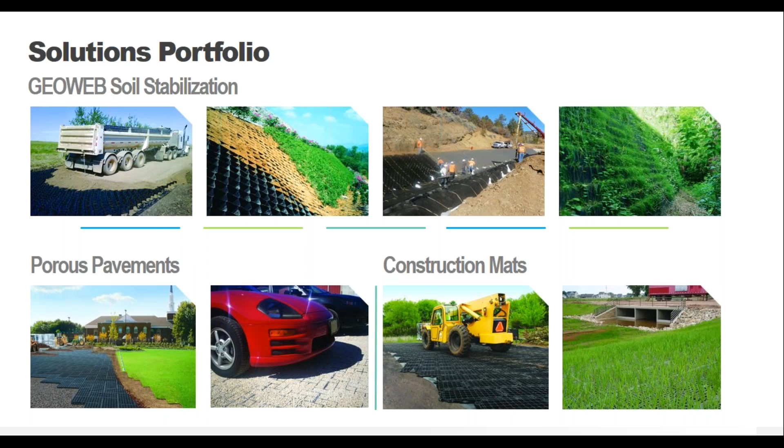So let's begin with discussing how GEOWEB 3D confinement can provide benefits for unpaved surfaces. The GEOWEB system consists of 2 main attributes. The first is the cell size. The cells come in 3 different diameters, including 20V, which is 8.5 inches in diameter, 30V, which is 10.5 inches diameter, and 40V, which is 18 inches diameter.

We have 5 different section depths: 3 inches, 4, 6, 8, and 12 inches. We have different cell lengths consisting of 18, 21, 25, 29, and 34 cells in length. The actual cell size and height depend on site-specific project details and site conditions.

As I mentioned, Presto will provide that free evaluation, including a written summary, calculations, cross-sections, and specifications, once again, no matter the size of the project. And like I said, we do not recommend the standard charts and tables.

The ultrasonically welded seam, where all of the connecting points are located, is very important to the function of a geocell. The stronger the seam strength, the better performance of the geocell, period. A strong seam allows for better lifetime performance.

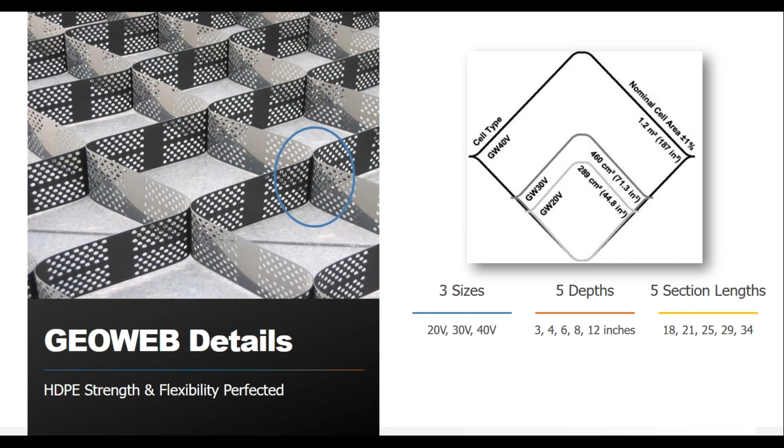Here you can see a typical GeoWeb panel. It comes tri-folded on a pallet. Each section, here you can see the tri-folded panel. It comes with a nominal width, each panel has a nominal width, and it expands like an accordion.

Different section lengths, anywhere from 18 feet up to about 52 feet. And if you have a large type project, we can actually custom make the length to meet your project conditions.

A typical pallet ships very economically to the job site. A typical pallet has approximately 3,500 square feet of material.

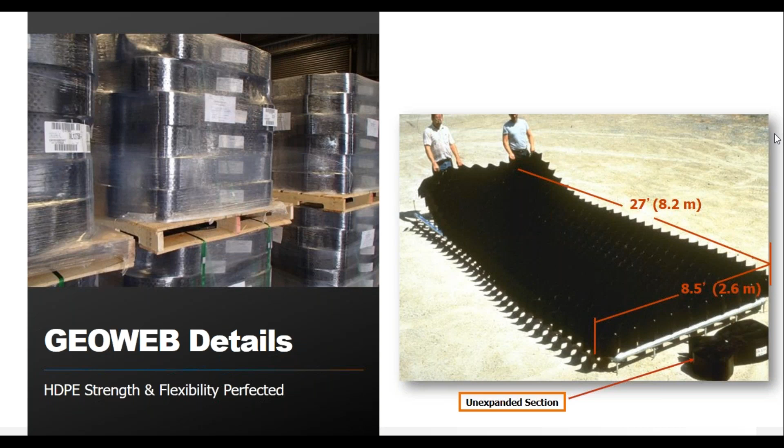GeoWeb is manufactured using a proprietary blend of high-quality virgin HDPE resin. Our proprietary formulation has stood the test of time for more than 40 years and contains no fillers, unstable polymer combinations, or exotic polymer alloys. For most typical sites, GeoWeb retains its durability for greater than 100 years, with lab testing indicating 149 years without degradation, even at full exposure to the elements.

We stand behind our numbers so you can deliver certainty in the solution as you build with the materials that you trust.

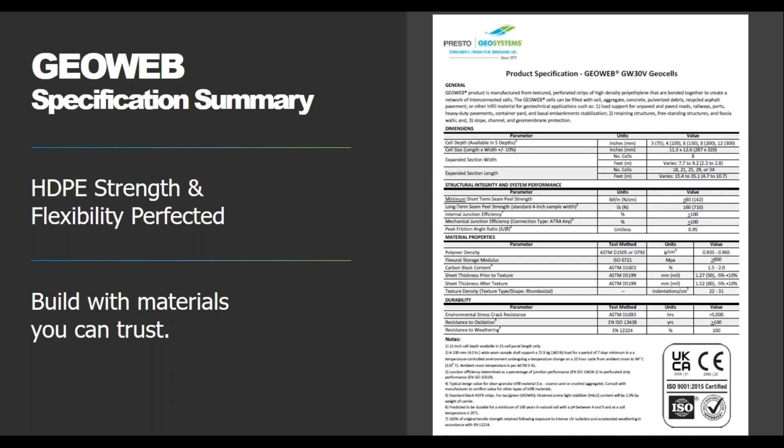GeoWeb and all of our accessories are 100% made in the USA. We do not have any products that come from outside the United States.

The system components are all of the supporting pieces that help the GeoWeb system protect the surface and sub-base layers, and also ensure relatively uniform performance of their interconnected system, thereby protecting against the damaging effects of deformation and differential settlement in response to applied vertical loads.

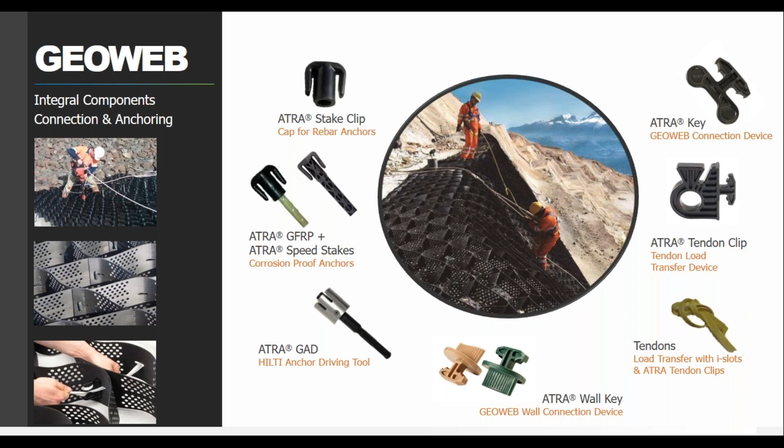Presto GeoWeb is equipped with numerous design and construction components that increase strength and speed installation for all of our different projects, whether that's load support, slope and channel protection, or earth retaining walls.

For load support applications, which we're focusing on today, the ATRA Key is the major component for a completely integrated system. ATRA Keys connect the GeoWeb panels into a single system.

The ATRA Keys speed installation and are made out of 100% plastic and will last the lifetime of the project. ATRA Keys ensure that the panels will not separate and that the GeoWeb system will not fail under anticipated loads.

The specific engineering values of the ATRA Key will ensure the system holds up to loading over time without the corrosion seen in staples or the failure of underperforming components.

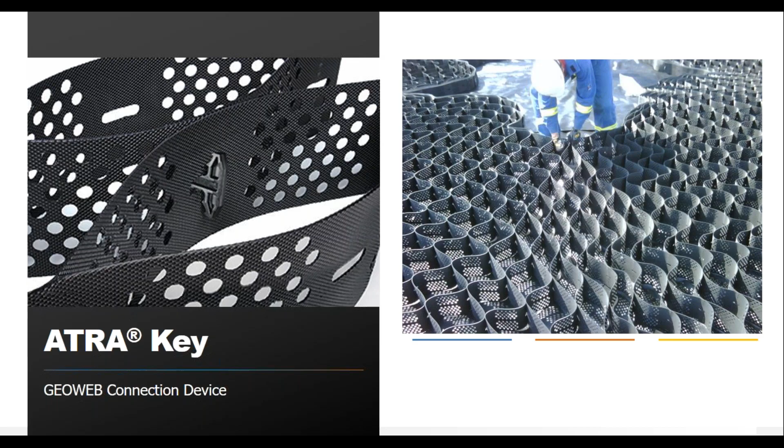The purpose of geocell confinement is very simple, and that is to stabilize the movement of unstable soils, whether that is both horizontally and vertically. It is an engineered system integrating multiple geosynthetics with the best method of confinement and subgrade stress reduction.

Although today's discussion will focus on our unpaved access roads and pads, we do have other applications which I mentioned - slope protection, channel protection, and GeoWeb walls. If you have any interest in any of the other applications, please reach out to us and we can discuss.

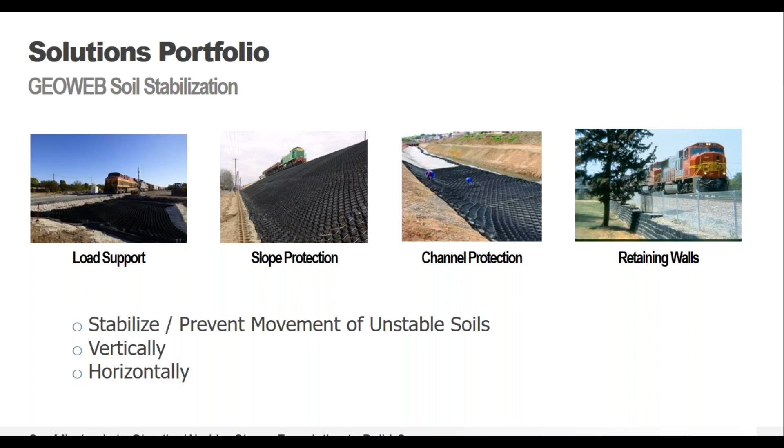Then we decide if we need a geotextile separation layer, whether that's a woven or a non-woven geotextile. That's based on the application and the subgrade type.

When we speak about woven geotextiles, we are referring to enhanced woven geotextiles and not slit tape wovens. As most of us know, slit tape wovens do not allow drainage, which can lead to pore pressure buildup, potentially global failure of the road. So we want to make sure that we're using enhanced type woven geotextiles, which allow the flow of water to flow freely up and down through the cross section.

When using non-woven geotextiles in low subgrade CBR areas, it is important to be aware of the fines content. Non-woven geotextiles are 3D in nature, so fines can actually migrate up into the non-woven geotextile and clog the openings, which can also lead to pore pressure buildup. Non-woven geotextiles are typically considered clogged before installation with fine contents higher than 15 to 20%.

So just make sure that when you're doing your project - and we'll work with you too on the subgrade and the soils report if you have the information - what type of geotextile is required for your project.

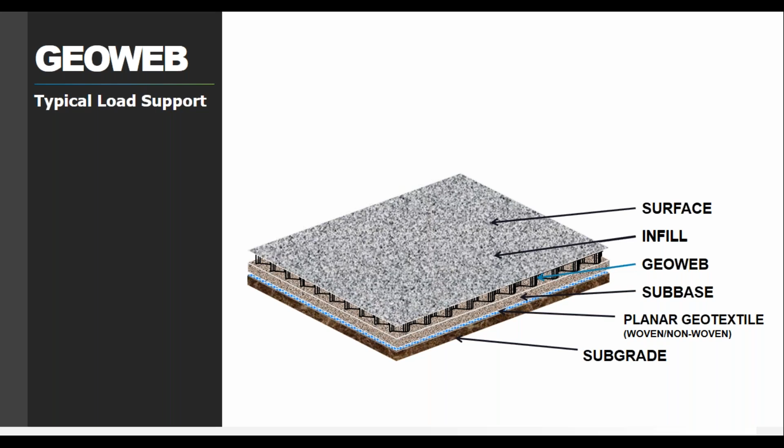We'll typically have a surface course, a wear surface on top of the geoweb to protect the top of the panels. Typically it's a minimum of a 2-inch wear surface, and depending on the amount of load and the subgrade strength, that could range anywhere from 2 to 6 inches. But we don't want too much on top of the geoweb, because then you're just going to have more rutting of that surface course in supporting the given load.

So geoweb confinement works this way: when a vertical load is applied, the active earth pressure in the loaded cell pushes back against the passive earth pressure in the adjacent cell to form a stable system. Each cell helps support the ones around it.

The geoweb cell walls also transfer hoop stress, which is important in keeping the system intact and creates what is known as the mattress effect. The strength of the seams around each cell, the material stiffness of the individual strips, and the connection method between the panels are all important factors in determining how the geocell system can improve site conditions.

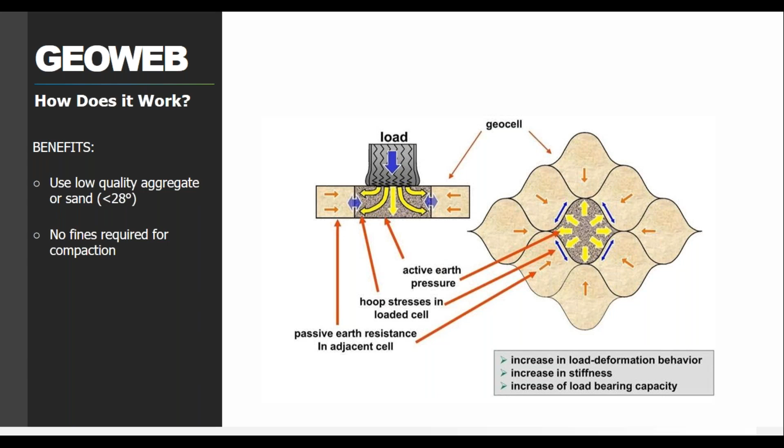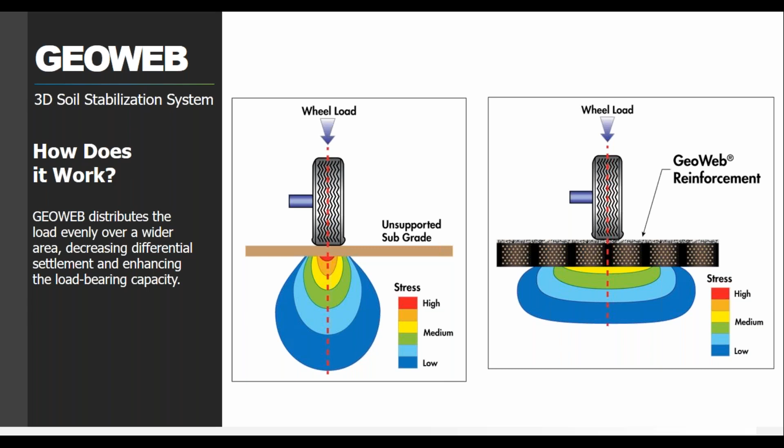Here you can see the stresses on the subgrade, with the unsupported subgrade on the left and the geoweb reinforcement on the right. Notice how there's a complete elimination of the highest stresses at the surface with the geoweb reinforcement. The stresses are reduced and distributed over a wider area, which is called the mattress effect. This reduces stress reaching the subgrade and leads to a significant decrease in deflection and rutting.

The second main attribute of the geoweb system is the infill. As I mentioned, the important benefit is that even a low quality aggregate, recycled materials such as crushed concrete, or even sand can be used to fill the cells.

Using recycled materials, low quality aggregates, pit run, crusher screening rejects, or sand saves a significant amount of money, not only on material costs but also on hauling cost. We can also eliminate fines when desired, since the cells provide confinement and aid compaction or cohesion with soils. Without fines, you can significantly improve drainage and let water flow freely through the system, preventing pore pressure buildup and global failure.

The ability to use sands and low quality aggregate really sets the geoweb apart from other geosynthetics. Those products require high quality crushed aggregates with high friction angles to achieve optimal performance. With the geoweb system, low friction angle materials are just fine. The geoweb panels achieve their full potential even with these poor materials, which can be a huge cost savings.

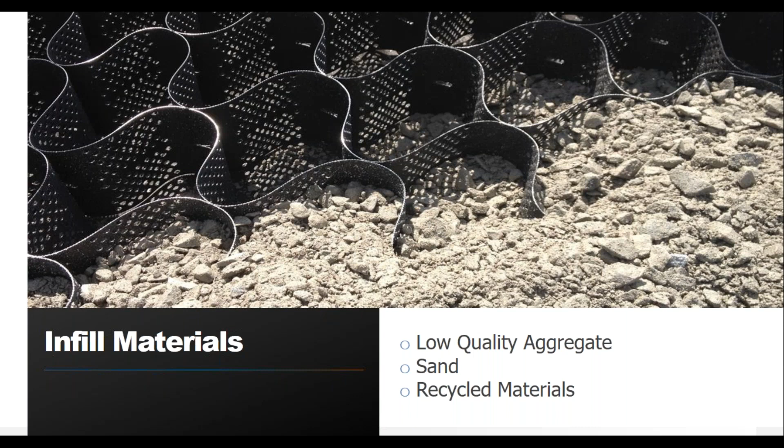We grade the area, install a layer of enhanced woven geotextile, typically with strengths ranging from 2,800 to 4,800 pounds per foot. And then we install the geoweb layer. The depth of that layer typically is a minimum of 6 inches, but the actual size will be based on our evaluation. Same with the geotextile. The actual strength of the geotextile is, once again, based on the subgrade strength and is determined when we prepare the calculation.

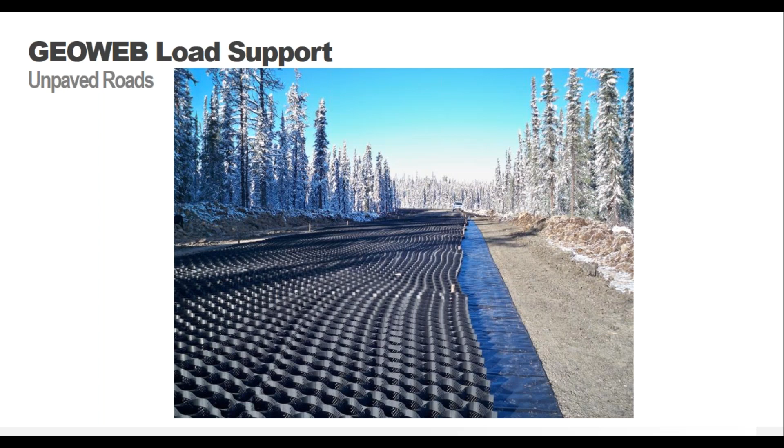Since it is an access road, a little bit of deflection is usually acceptable. We try to keep the deflection to around 2 inches. If less deflection is desired by the owner, we can prepare our calculations to limit that deflection. This is a remote access road to a drilling pad, as stated previously, so the subgrade strengths are so low, we need to construct it during the winter.

Here you can see the installation of the enhanced woven geotextile with proper overlaps, based on that subgrade CBR. This installation had a very low CBR value, so we went with a minimum of 3 feet of overlap. We typically follow AASHTO M288 and the geotextile manufacturer's recommendations for overlapping.

So this contractor has pre-assembled the geoweb panels with the ATRA Key connection device. This road was over 30 feet wide, so they pre-assembled 4 panels of geoweb together. Remember that each one of these panels is about a nominal width of 8.5 feet. So once the 4 of these panels are connected together, it basically fills up that whole 30-foot wide road. The pre-assembling of the panels will significantly speed up installation.

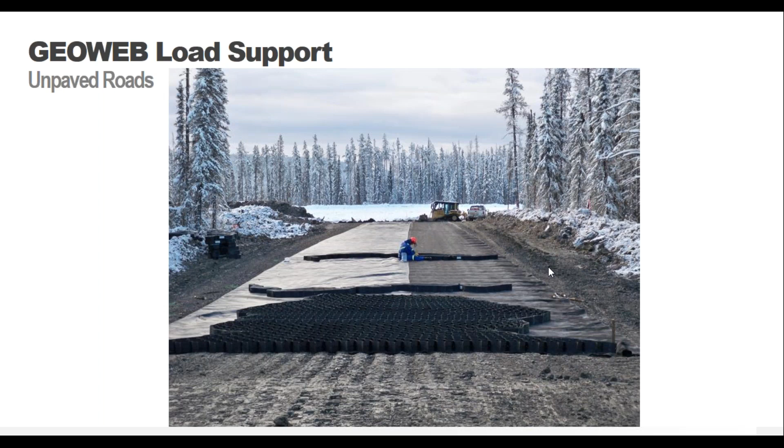Once again, your aggregate is very expensive in these remote conditions, due to the cost of the aggregate itself, but also expensive to be hauled in from very long distances away. So you can use low quality recycled materials such as sand, pit run, screening rejects for infilling. Geoweb is very easy to install in the field. You can see here that the contractor actually just cut some wood stakes to keep the geoweb panels expanded, since someone forgot to put the rebar onto the truck.

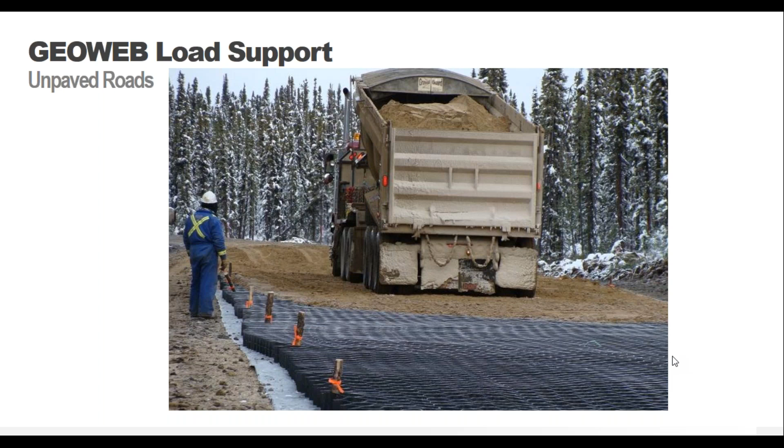So the infill here, you see the truck just backs up and dumps the material onto the expanded panels. So no special installation techniques are ever really needed. You just dump and spread the material. Once the infill is dumped onto the edge of the panels, the material is just spread out, typically with a dozer or a grader, a lot of times with a GPS system. The access road project here used the local screening rejects for the infill. Since it was in such a remote section, it saved a lot of time and material costs, but the most significant savings were in hauling costs.

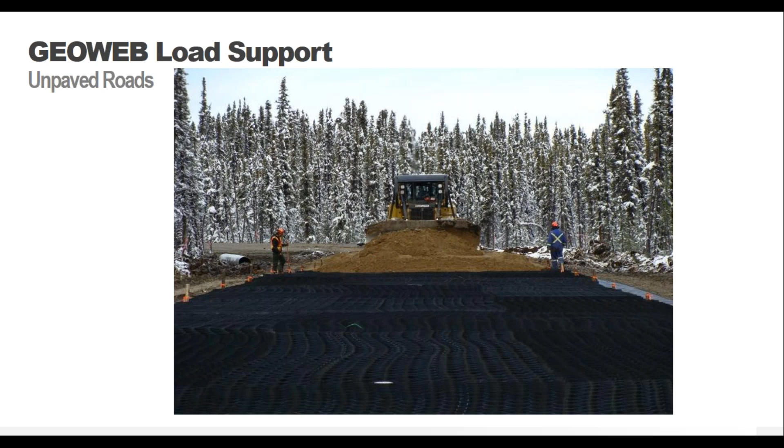This is a project from a couple years ago. The customer contacted us and our distributor to discuss the options for rehabilitation of an existing access road that was failing. The rehabilitation was required to handle the rigors of a new plant expansion and commissioning. The existing access road originally served as a secondary access road into the facilities in the region. The access road had not been in use for several years and had become almost impassable during spring and summer rain events due to neglect and lack of maintenance. So the customer asked for recommendations to provide load support options to drastically improve the performance of the road.

So one of the main challenges was to keep the road operational during the initial subgrade prep and to stage reinforcement material and gravel in advance of the road being closed for repairs. The execution plan for this road was only about 2 weeks. It's 7.5 miles long and 32 feet wide. So the project was successfully completed during a very wet construction season.

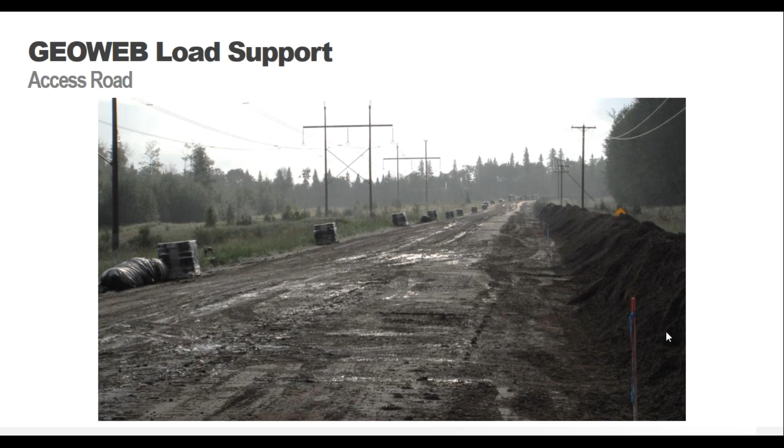So we worked with our distributor and owner to provide a recommendation that would provide a stable road surface and one that can be installed within the 2-week time frame. The initial deployment of the geoweb panels and enhanced woven geotextile, initially defined as very poor, were successful, so that a second layer was not required. And that's the second layer of geocells.

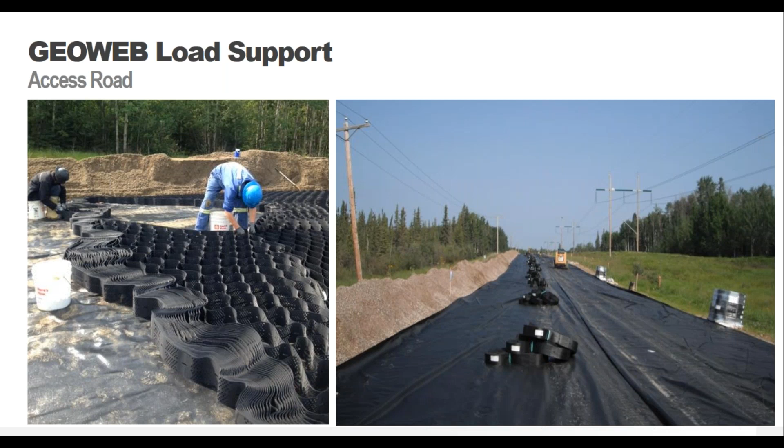A key to installation was the use of the ATRA Key connection device. The ATRA Keys, like I said, speed up that installation, and that's side-to-side and end-to-end connections. ATRA Keys are the strongest and safest connection method and allow for multiple panels to be connected and deployed at one time. The recommendation for this project was a 2,800 pounds per foot enhanced woven geotextile, our mid-size GeoWeb 30V, 6-inch deep panels, and a 3-inch wear surface.

Since this road was 32 feet wide, the road will require at least 2 rows side by side of enhanced woven geotextiles with a 3-foot overlap. Based on this width and the low subgrade CBR strength, it was determined during the evaluation phase to factory sew together 2 rolls of geotextiles to save on material used for the 3-foot overlap. We also used factory sewing of the geotextile to speed up installation to meet the 2-week construction window.

When you need additional rolls of geotextile side by side, I would highly recommend reviewing the option of factory sewing the 2 panels together. Factory sewing eliminates the overlap, which on this project would basically save 3 feet. So you can imagine how much material was saved. Since the road was 7.5 miles long and with the elimination of the 3-foot overlap, we saved over 20 rolls of enhanced woven geotextiles, resulting in material savings of over $40,000. That savings did not include the additional savings in reduced shipping and installation time.

You can see in this photo the geotextiles factory sewn together, and it is folded over before being placed on the roll. Then you just roll the geotextile out and unfold. Factory sewing also makes it very easy to pre-tension the fabric before placing the geoweb panels, since it is one large piece. The cost of the factory sewing is very inexpensive. Sewing is usually less than the cost of material wasted by overlap, and sewing really speeds the installation rate.

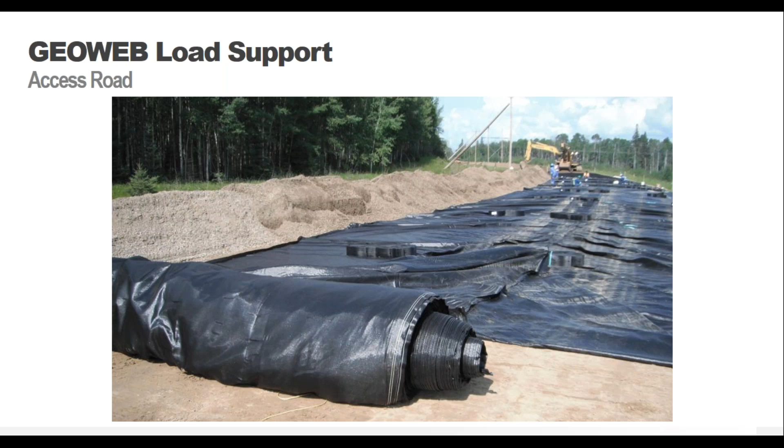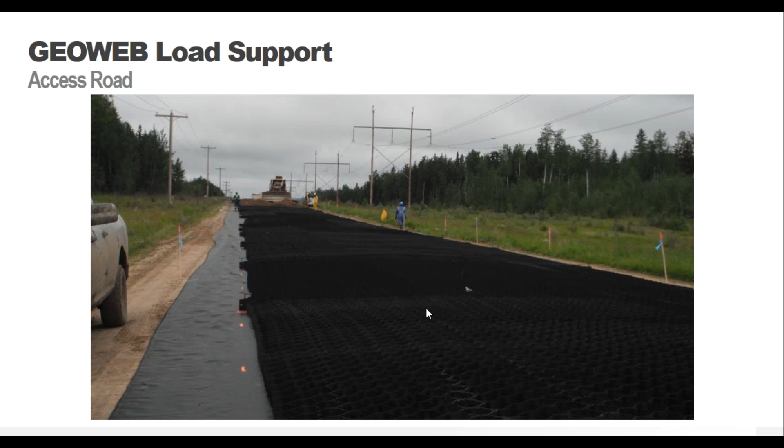The contractor for this installation wanted the road width to be very precise. So once the woven geotextile was placed, the survey crew went and marked both sides of the road. You can see the stakes here and also the dashed line here where the panels went down. The stakes on the side of the road were to keep the panels from moving when expanded. And notice the minimum staking required. So prior to gravel install, the left edge is pulled and oriented to be right along the dashed spray-painted line on the left side.

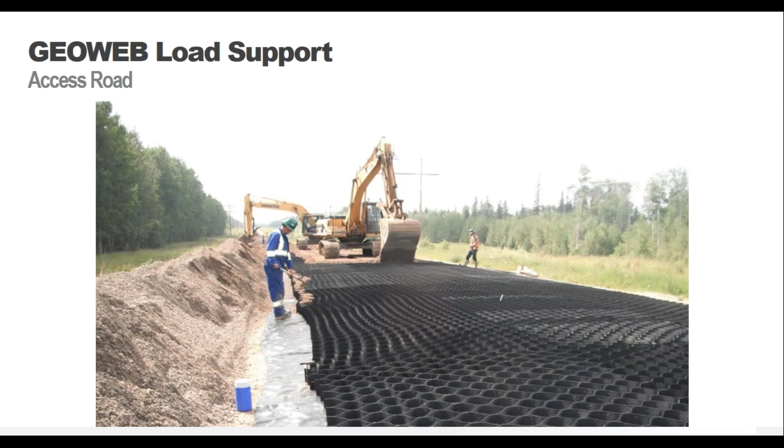Here you can see the geoweb infill being stockpiled on the left side of the road. Then the excavator filled the 2 lanes down the roadway and transferred the remainder of the stockpile material to the geoweb panels. As mentioned previously, that fiber optic line ran down the right side of that road. It was completely off limits.

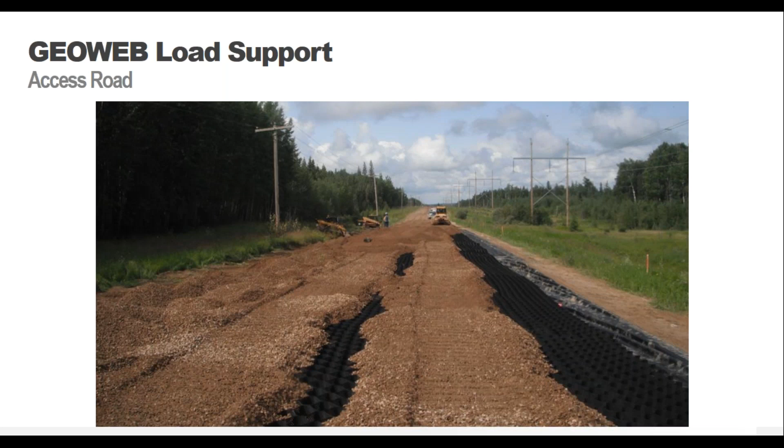Here you can see an up-close view of the 2 tracks installed by the excavator. Once the excavator constructed the 2 lanes, smaller bobcats followed along and were used to transfer the remaining stockpile material and fill in the geoweb to get grade and crown. So once that was finished, a dozer was used to final grade the road.

Typically, as I mentioned before, dozers have a GPS unit for a consistent final wear surface. For this project, we did recommend a 3-inch wear surface over the top of the geoweb panels due to the number of passes. So the wear surface may be a little more when a roadway or pad is subjected to very heavy loadings.

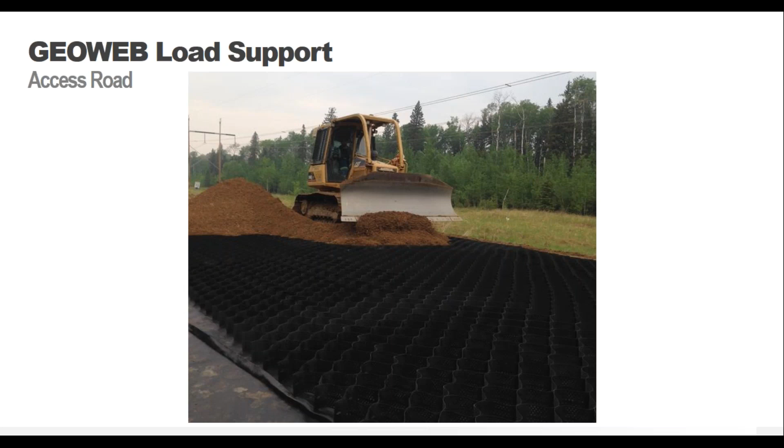We have completed some projects using geoweb for stabilization for walking drill rigs that have a very heavy loading and heavy footprints over a small area. And we use 6-inch wear surface for those applications.

And here's the completed road finish in time with the wet weather. Remember that this project was 1.3 million square feet, 7.5 miles, 32 feet wide. It was installed in 2 weeks with a little bit of downtime due to wet weather. Like I mentioned before, it's installed very quickly. And once the crews get going, a crew of 3 to 4 can easily install 3,000 to 4,000 square feet of geoweb in an hour.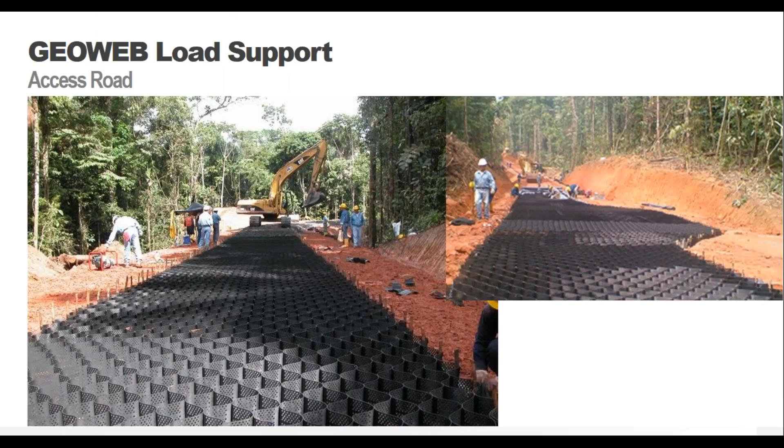So each Geoweb panel has a nominal width, as I mentioned before, of 8.5 feet. So we just connected the panels together, just overstretched them a little bit. When installing Geoweb, it's pretty flexible, so you can over or under stretch the panels to meet a certain width. You can see the owner wanted to have a very precise edge to the road, so they staked it almost every other cell on the side of the road. You can see it right here and on both sides.

Interesting part of this project is rather than make the entire road wide enough to accommodate 2 vehicles to pass side by side, they added pull-offs to let vehicles pass every couple hundred feet. And you can see that right here. So about every couple hundred feet, they had this little pull-off area, so the vehicles just pull off and let another vehicle pass. You can imagine how much money that saved them versus constructing an entire 6-mile road, double that width. It's very easy to accommodate curves with the Geoweb panels since they're so flexible. You just over or under expand the panels depending on whether it's an inside or outside curve.

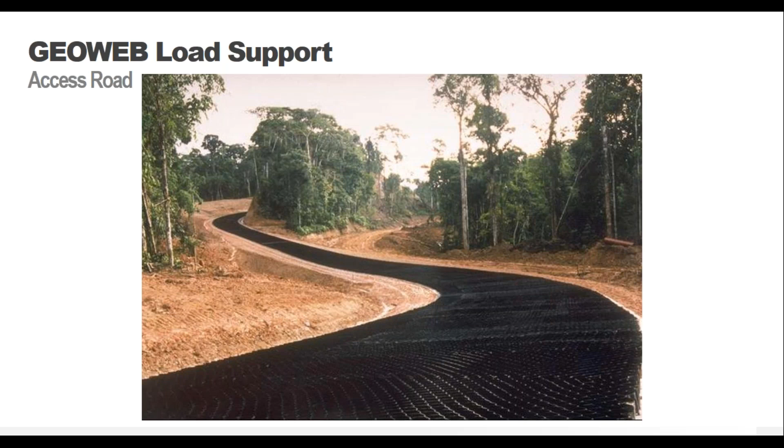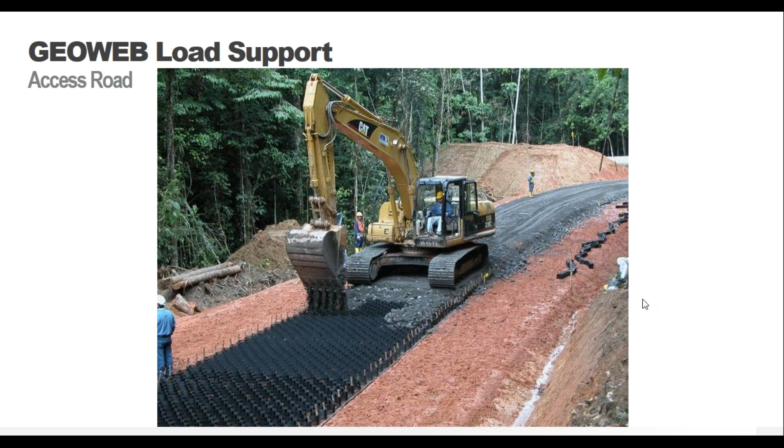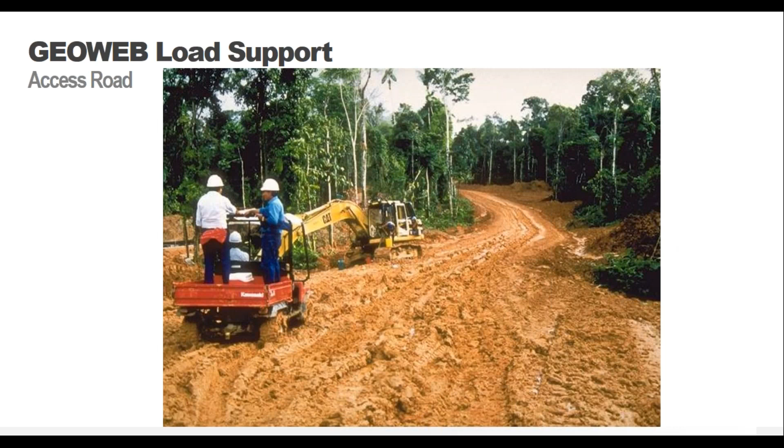Here you can see them infilling with the locally sourced sandy aggregate mix. This area gets a lot of rain during rainy season. So the recommendation included the addition of channels adjacent to the roadway to divert the water away from the roadway. And here you can see those channels right here on the side. And also some pre-assembled Geoweb panels. So we went from this rutted, muddy, messy roadway that was basically completely unpassable to a finished roadway. So quite the improvement from the original that was severely rutted to this finished roadway.

This is a really interesting project. This was an access road in a really swampy area south of Baton Rouge, Louisiana. The original design included a couple layers of geogrid. The contractor installed about 1,000 feet of that. During this time, that area got just pounded with rain, significant rainfalls, really low subgrade CBR, and due to the heavy loads, low subgrade CBRs and the heavy rains, 1,000 feet of grid actually failed after a couple passes of the vehicles trying to access the site for construction.

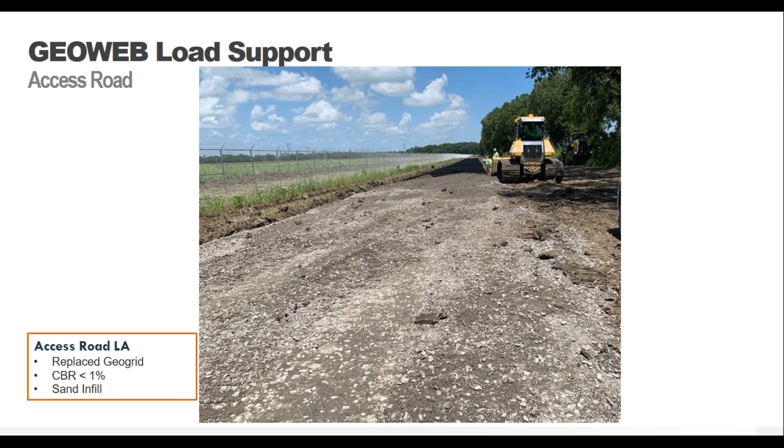So due to this, the engineer contacted us since we have worked on so many projects with them. We prepared a value engineered solution. So the 1,000 feet of installed geogrid was removed, and replaced with a layer of 4,800 pounds per foot enhanced woven geotextile and our mid-size GW30V panels, 6 inches in depth.

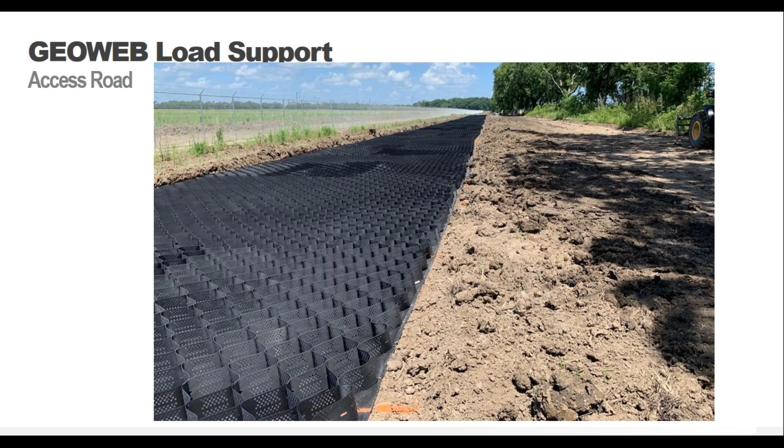So the geogrid design, like I mentioned, had 2 layers of grid along with 16 inches of high quality aggregate. So we accomplished a successful access road with a lesser quality and lower cost aggregate with a cross-section reduction of about 50%. Once again, you can just see the flexibility installed for the curves in the roadway with really no issue. This roadway had a significant number of curves that we had to negotiate, so that panel flexibility is very important.

A Presto representative or one of our distributors will be on site to help the contractor negotiate curves, since it's very easy once you've done it, but very hard to explain in the installation manual. So once again, it's important to have on-site presence from the manufacturer to teach the contractor the tricks for a speedy and efficient installation.

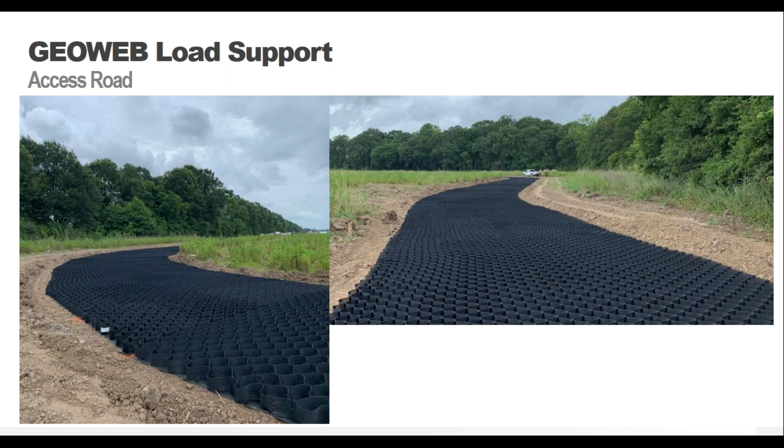Once again, the infill is just dumped onto the unfilled panels and spread with a bulldozer, typically outfitted with a GPS unit. The infill used here was a low quality aggregate sand mix that was pretty local to the site, so the owner saved money on the infill itself and on hauling costs. This is a big advantage, especially now with aggregates. There's really a shortage of aggregates in the U.S., certain parts of the U.S., Canada, and pretty much around the world trying to source good high quality aggregate.

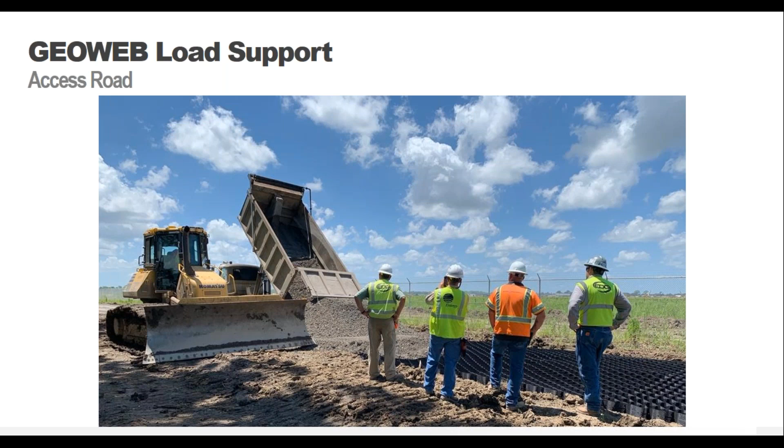Here you can see the final road after construction.

I'll talk about some drill pads. For a typical pad, once clearing and grubbing is completed and the drill locations are marked, a clay base is provided to control spills, leaks, and drainage. You then bring in wooden swamp mats to allow for construction equipment access, then heavy steel mats are installed to allow the drill rig to operate on the pad. When drilling and completion works are finished, the mats are removed to allow installation of the piles, piping, and electrical work. Since the clay cap doesn't drain well, once the steel mats and wooden mats are removed, the clay subgrade needs to be reworked, reconditioned, and regraded.

If the clay gets really wet, wooden mats typically get pushed into the clay layer, and additional mats may be required. These wooden mats are heavy, typically about 15 by 20 feet in size, so you need a front end loader to move them around the site to replace them. That front end loader will further degrade the clay layer as it traffics across the site. We've been told by some owners that rework costs can easily exceed $500,000 or more, depending on the size of their pads.

Due to these rework costs and delays, several owners reached out to Presto and our distributor to evaluate using GEOWEB for the pads to replace the wooden mats, based on success they'd had using GEOWEB on their roadways. The advantage of using GEOWEB is you build the pad up front, eliminating the need for wooden swamp mats and any associated rework costs. When drilling and completion operations are finished for a typical conventional pad, they always place about an 8 to 10 inch gravel layer to support operations. By using GEOWEB versus wooden mats, we reduce the requirement for reworking the clay subgrade and provide a clean, free draining platform to conduct operations, which actually reduces the life cycle cost.

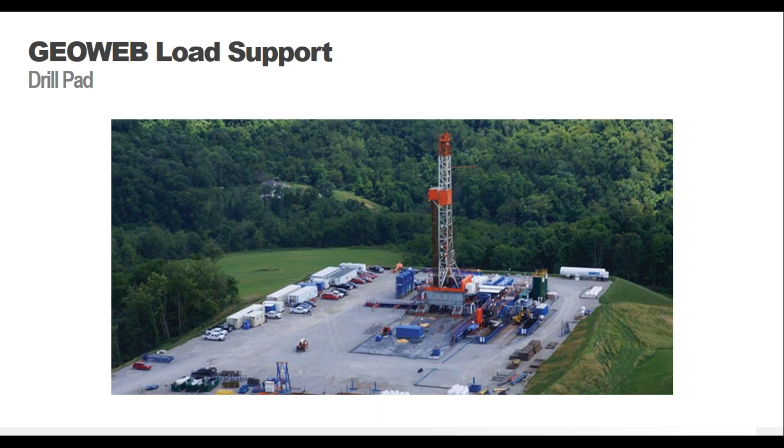Often, construction of the pad, drilling, completion work, and operations each have their own separate budgets related to a given site. By using GEOWEB, we reduce the overall construction cost by building a stronger, finished pad up front and eliminate all the rework costs. Some pads are now being constructed with liners, and we can still offer advantages by providing a more stable wearing surface and less maintenance.

Since GEOWEB can provide a finished surface before any drilling work begins, you can imagine all the money saved. There are no wooden swamp mats required, and we eliminate the rework costs associated with the mats.

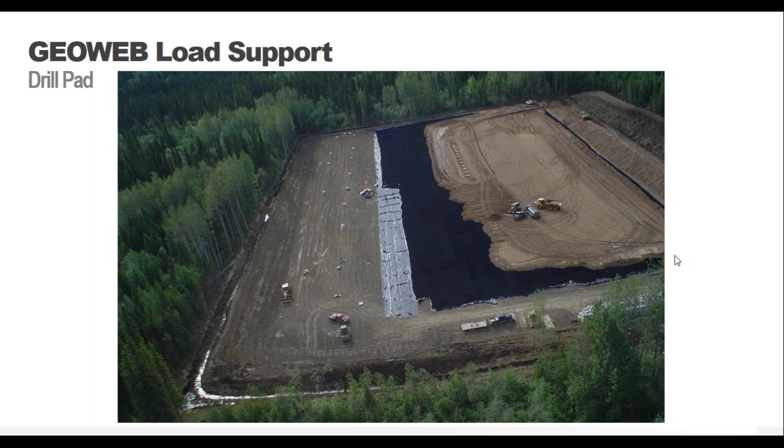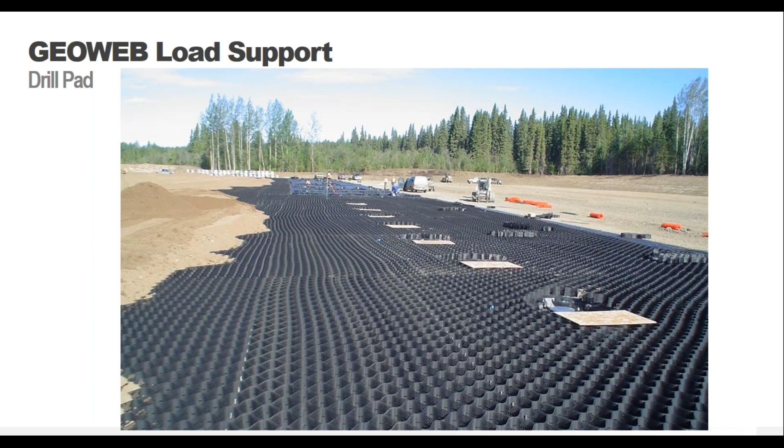Before GeoWeb is infilled, it's very easy to cut. Typically, you just use a razor knife. There's really not much strength to GeoWeb until it is backfilled and compacted.

This pad used screening rejects for the infill, so it's a very economical infill. The workhorse goes over the top of the panels. Sometimes they'll bring in a crushed aggregate.

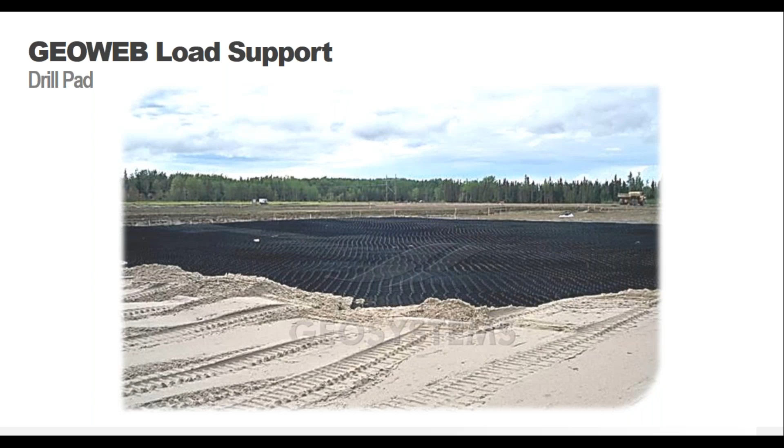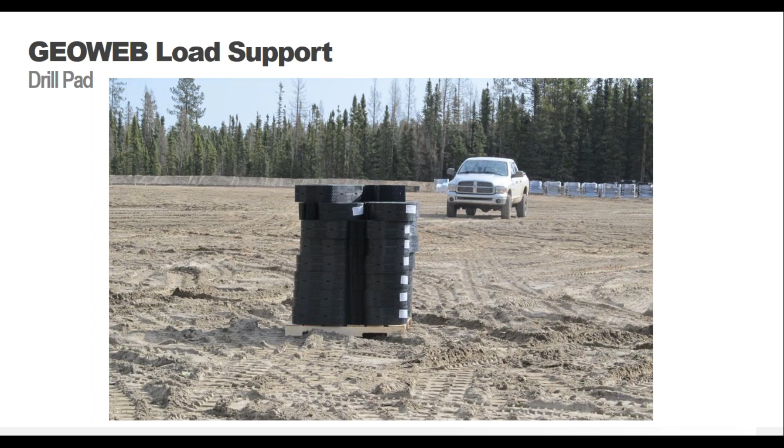GeoWeb also allows for improved site drainage as the water can flow freely laterally through the panels. This is the beginning of a typical pad that we've done multiple times for a major oil company. This is actually up in Canada.

Each pad is about 325 feet by 400 feet, so a total of about 130,000 square feet. We worked with the owner and our distributor to come up with a pad design. This was a typical pad design when they had a CBR around 2%. The evaluation showed an installation of a 2,800 pounds per foot enhanced woven geotextile.

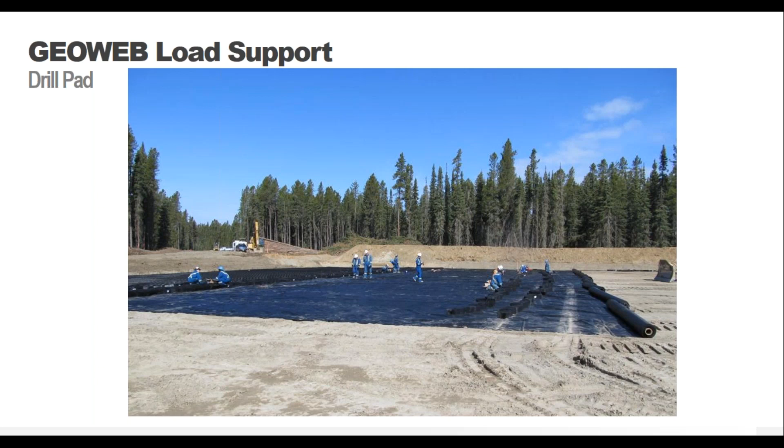As we discussed earlier, the seaming of the geotextiles in the factory—this project just overlapped separate rolls. It was a pretty decent CBR. Once again, this pad was approximately 130,000 square feet.

You can just see the contractors pre-assembled a couple sections of GeoWeb together with the AttraKey. Each section here is about—we used our 34 cell, so it's about 270 square feet. They are pre-assembling 3 panels, so each section they put in is about 810 square feet. So the AttraKey really allows them to speed up the installation.

Here you just see an up-close picture of the worker connecting the pre-assembled panels using the AttraKey. If you look down at the bottom or the side of the key on the right here, we've added frictional barbs to enhance frictional lockup with the textured GeoWeb cell walls.

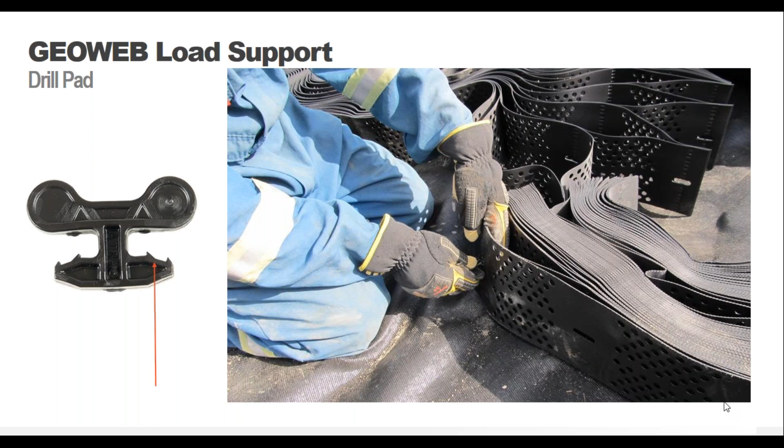Together, these features provide added protection against the 3 primary modes of mechanical junction failure. Those include shearing, splitting, and peeling. So, like I said, it's a pretty typical pad, as I mentioned.

The contractor on this pad used 2 crews of 3 workers, and they installed 130,000 square feet in 3 days. They were achieving installation rates well over 3,000 square feet per hour. So once again, the panels go down really fast.

This same crew went to another site to install the exact same pad and layout. So the contractor tried to save a couple bucks and went with a competing GeoCell and their zip tie connection device. It took the same crew, the same 2 crews of 3 workers, 10 days to install the exact same pad, since they could not pre-assemble panels and had to install each panel separately.

So it cost the contractor an additional 7 days of installation time and over $20,000 in extra labor costs to construct the same pad. As we all know, time is money, and project delays can be very costly.

On these drill rig pads, for this project, if they would have showed up with the drill rig, as they did the last one, within 4 days after starting construction, the pad would not have been ready. If that is the case, a lot of times they just typically take that drill rig and move it to a different project which is ready. So we'll have to wait for another drill rig to get ready, which can lead to a lot of lost time.

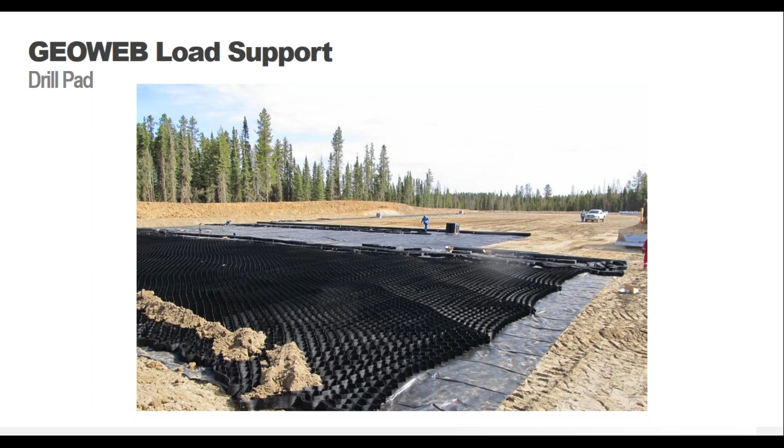So when evaluating products, it's really critical to look at the entire package versus just the material cost. Presto, or our distributors, will be on site to help the contractor install the panels, including all the tricks to speed up that installation. We also have hundreds of installation videos we share during our pre-construction meetings with the contractors.

Here is a finished picture of a completed drill pad. This is one that went with GeoWeb.

This is what the pad looked like after 1 full season of drilling and completions work. The pad went through 1 winter, spring, summer, and the following fall. The drilling operations used no wood matting through the entire process, and the surface of the pad did not need any rework prior to getting ready for infrastructure and tie-in work. The pad was constructed with geocell up front. So this pad, you can see, is in tremendous condition, considering the abuse it had taken over 1 year of activities.

As discussed, the advantage of geosystems is you don't need the wooden swamp mats. That means two things. One, you don't have to pay to rent them, and you don't have to move them around site with a front loader, or have additional mats required if the pad degrades. Two, you can access the ground to place infrastructure like piles or electrical without moving mats around. So eliminating the wood mats leads to significant time and cost savings.

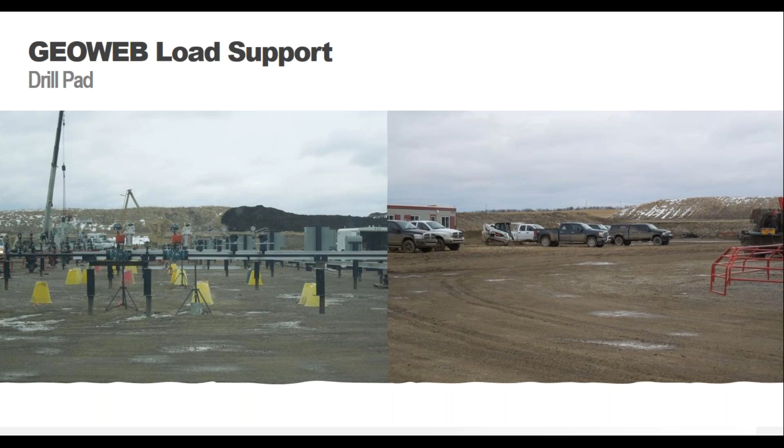The right-hand photo shows the peripheral area of the pad, and it's in great shape after the drilling and completion operations. The left-hand side shows the piping and supports. If you had wood mats, they'd all have to be removed before that installation took place.

This is the same facility after 5 years of operation. After drilling and completions, the site was turned into a production pad. After 5 years, they have yet to rework the surface, even after all the vehicle traffic and maintenance equipment that has accessed the production pad. So 5 years of operation without maintenance proves the impressive performance and cost savings due to using geocell. It's best to eliminate the wood mats by using geocell up front and build the pads to save time, material, maintenance costs, and reworking of the pad.

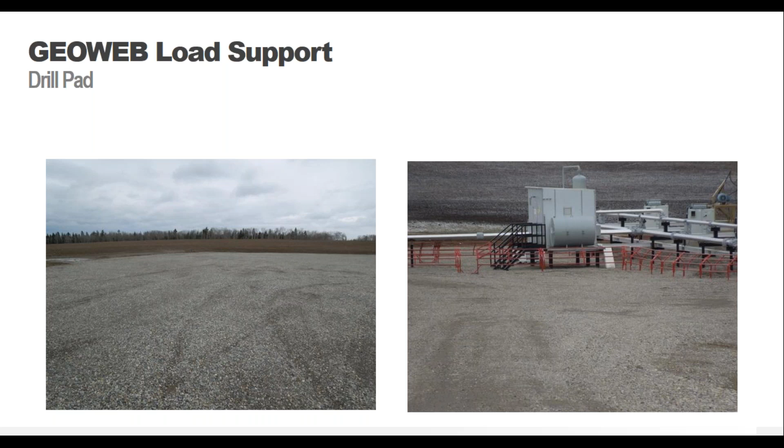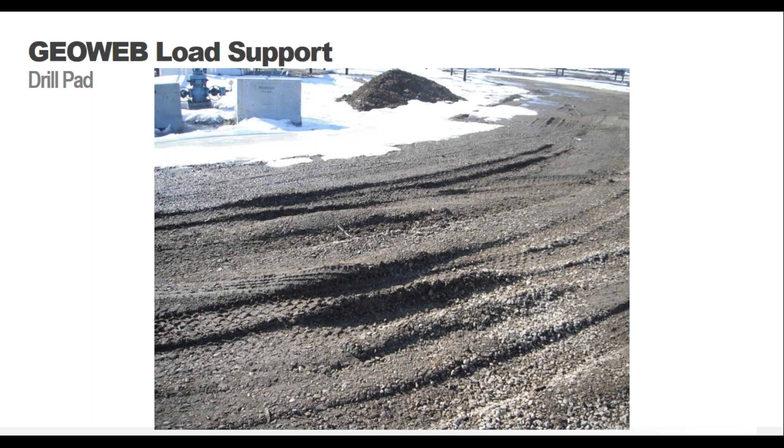The overall cross section here was about 8 to 10 inches of crushed aggregate, but as you can see, the fines have migrated from the subgrade below and have contaminated the layer, which is leading to the severe rutting. Due to the weak soil conditions, large ruts were being formed with the heavy vehicles.

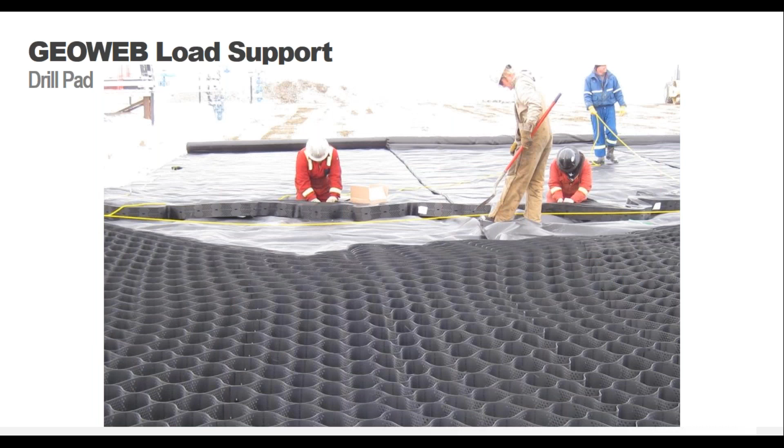The challenge was to provide a solution that was less expensive than matting, and that could be installed during the winter construction season and left in place for the life of the lease. The entire area that required stabilization was approximately 90,000 square feet. The pad was about 200 by 400 feet. We worked closely with our distributor and the owner to come up with a recommendation based on actual site conditions, vehicle loading, and the number of passes.

Once again, here we went with an enhanced woven geotextile, our mid-size GW30V cell, 6 inches in depth, with a 4-inch wear surface. Here you can see once again the workers connecting the panels together with the ATRA Keys.

Geocell sections are very easy to deploy and install with local crews, even in remote or difficult access locations. The only training required is the tricks I've discussed to speed up installation, which we provide prior to startup. A representative from Presto or a distributor will be on site to assist with installation.

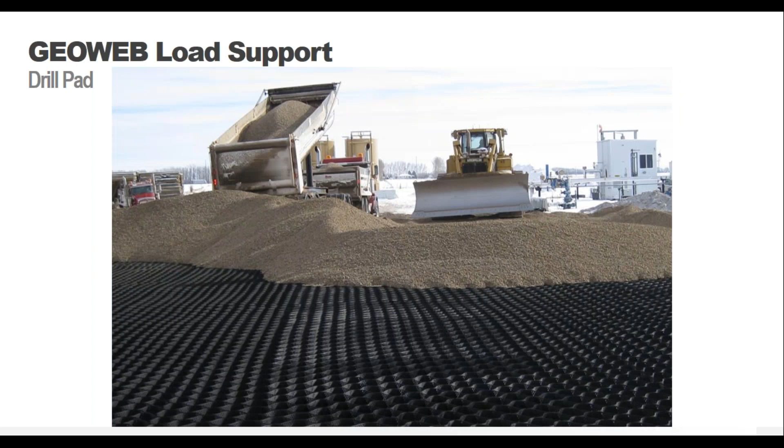To save further costs, the contractor used screening rejects, which work just fine inside the panels, as mentioned. You don't have to have a high quality aggregate to achieve stability with the geocell; we can use those low quality aggregates. When we developed the geocell technology back in the late 70s with the Army Corps of Engineers, geocell was actually called SandGrid. It was developed and basically invented to use with sand infill, and that was the intent when we developed this technology back in the late 70s.

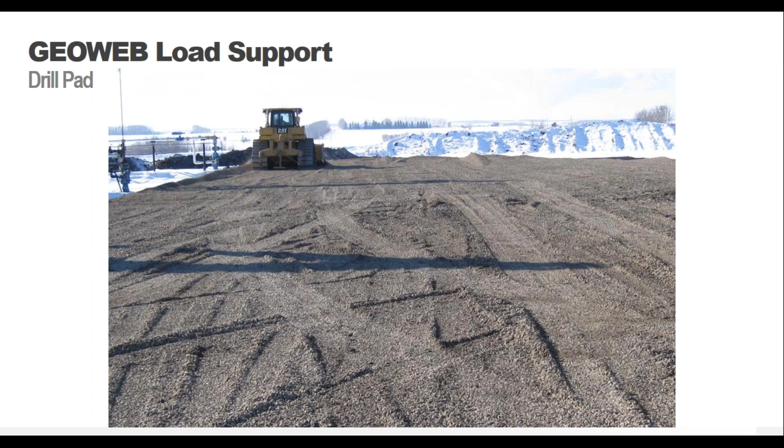As shown in the previous projects, the geocell infill is spread out with a dozer. A lot of times installing geocell infill and just driving over the surface provides adequate compaction. Compaction with a drum roller sometimes really isn't even needed. From this muddy mess that requires constant maintenance, additional material and high maintenance costs, to this clean, well-graded surface that will support the heavy loads, but also drain without the issues associated with a poor quality subgrade.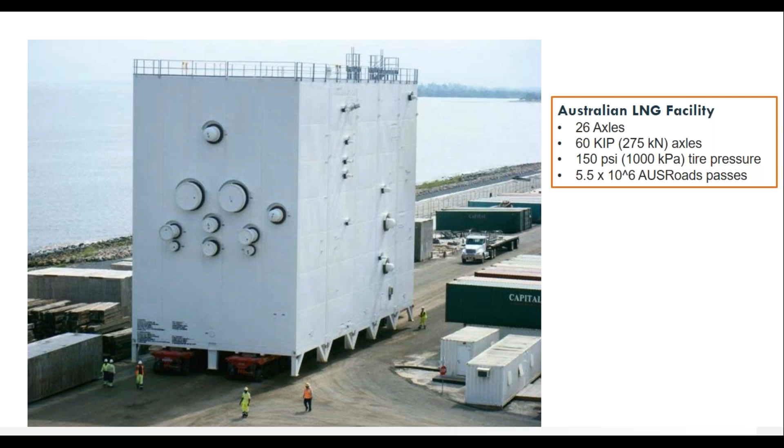Probably about 10 miles to the site. You can see the facility had 26 axle loadings, about 60,000 pounds each, tire pressures 150 PSI. So we worked with the contractor to prepare a design solution based on about 5.5 million passes and a 30-year design life.

We used the AUSRoads method for this evaluation. Here you can see the cross section we developed with the contractor. It was a very interesting design since we had to design the cross section not only for the load support, but also for the reinforced slope, to make sure the section did not globally fail on the edges as that heavy vehicle accessed this roadway.

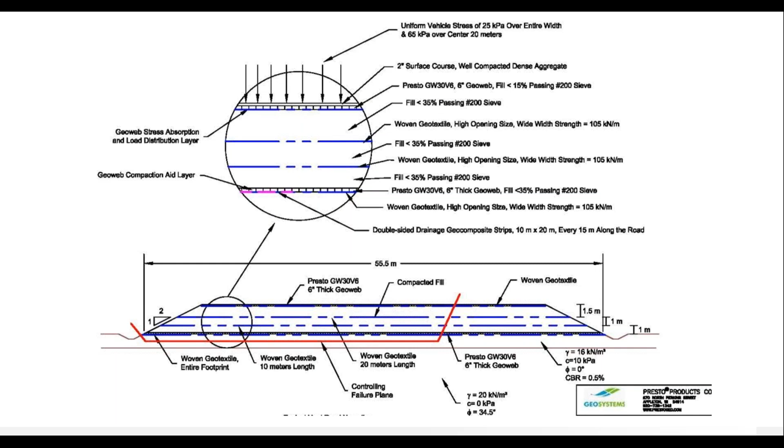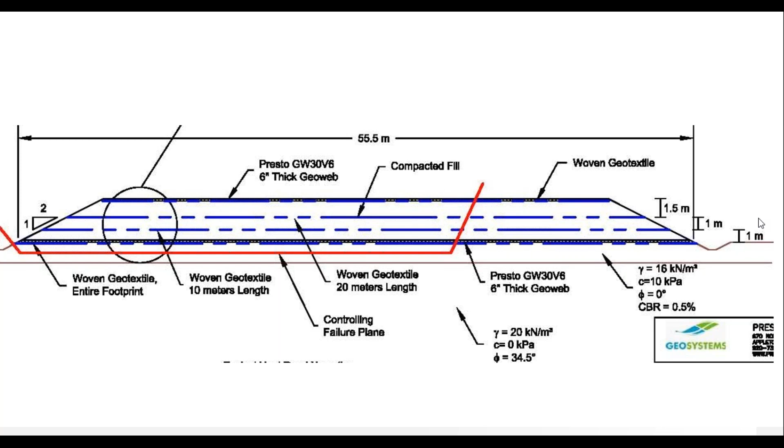And here you can see more of an up close view, so here this is a 2 to 1 side slope. We put down a layer of the woven geotextile, a layer of geocell infilled with local sands, just to allow the vehicles to build this site. Then 1 meter of fill, another layer of woven geotextile, a meter of fill, another woven geotextile, 1.5 meters of fill, another woven geotextile, then a 6-inch GW30V6 filled with local sand, and then topped with a 2-inch wear surface.

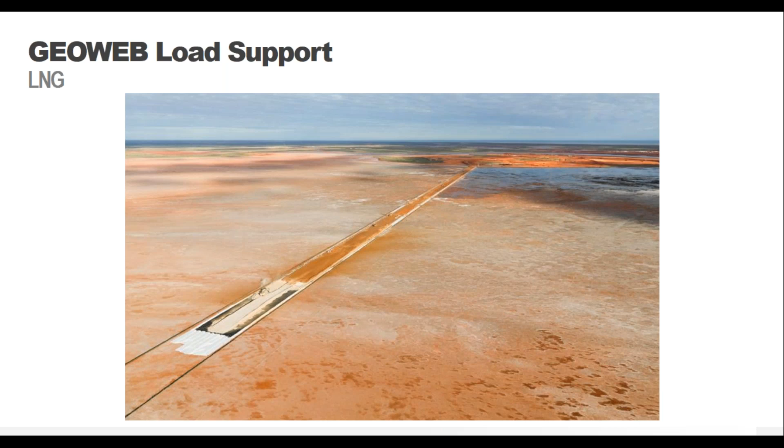Here you can see just an overhead photo showing the first layer of woven geotextile being installed, with the white layer at the left side of the slide. Moving to the right, you can see the first layer, that's the geocell in black, being filled. And moving further right, just a closer picture, you can see this was a very wide road.

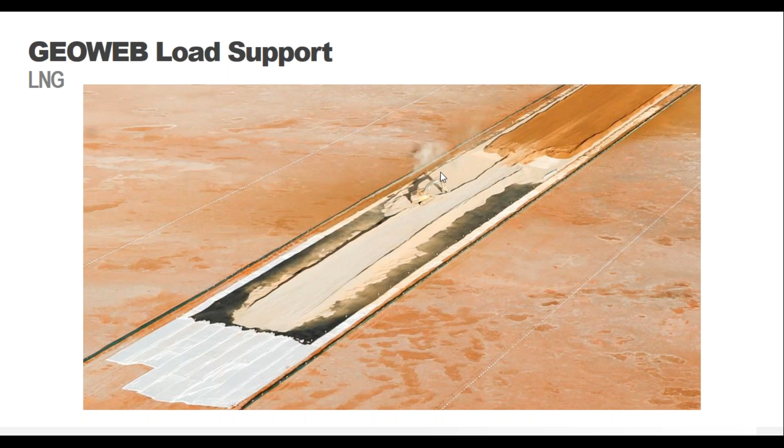For all of our projects, we provide free design evaluations. For unpaved roads, we use the basis of the Boussinesq equation, along with 40 years of research and testing and geocell improvement factors to come up with an adequate factor of safety for your project. We walk you through the entire design process so you and your customer understand exactly what we're doing. We provide all the necessary information that backs up our design, so you have certainty in what you're actually going to be building.

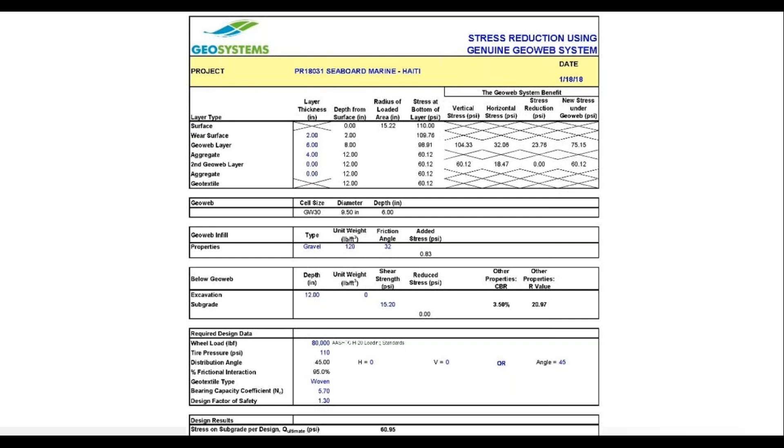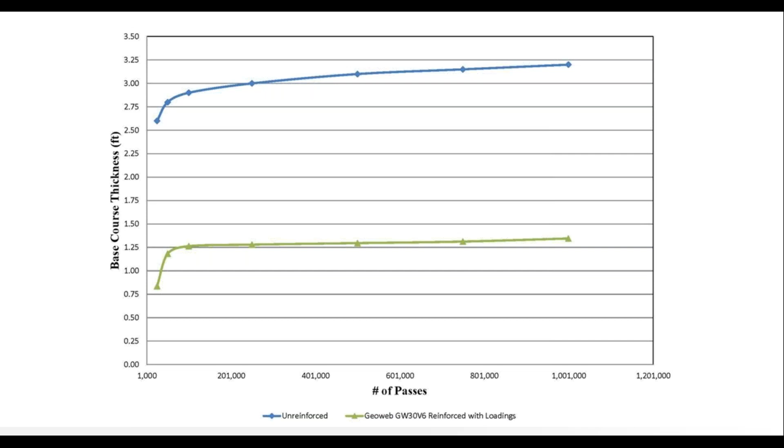For unpaved roads with a lot of passes, we use a modified version of the Giroud-Han method, the same method used by geogrid and geotextile manufacturers. We typically run this evaluation when the passes are over 10,000 for the service life, but if you're interested in this evaluation, we can also add this for any type of project.

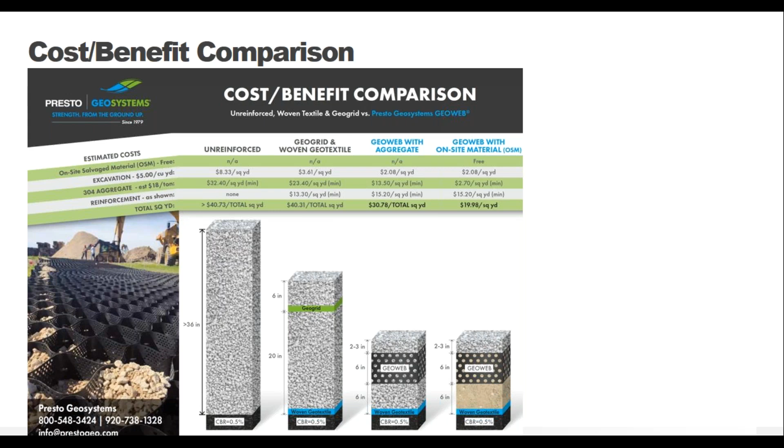So one of the factors of using geocell, you must remember, is that we can use low-quality aggregate, sands, and reject screenings. We've been getting a lot of requests for value-engineered projects lately after the bid, because contractors cannot source or even find enough high-quality aggregates for their projects due to aggregate shortages.

So in summary, the geocell system can be added for your project to provide a more stable and longer lasting surface course for unpaved areas, which reduces maintenance costs and repairs. Geocell can be filled with low quality materials, including sand, crusher screening rejects, pit run, or any recycled material.

The ability to use these low quality aggregates or even sand can save a significant amount of money, especially at remote installations. Since geocell significantly reduces the stress for reaching the subgrade, the cross-section depth can be reduced.

Geocell provides reinforcement to allow the system to perform over extremely soft and wet subgrades, handling heavy loadings. Once again, we offer a complete solution for all of our projects based on the projects' specific details and conditions.

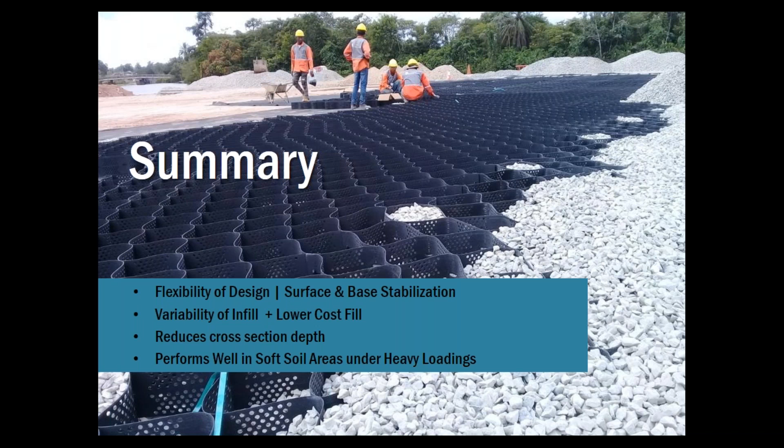And I can't stress this enough: we do not recommend using standard tables for any design, no matter the size of your project. So if it's a small project, 100 square feet, or 1 million square feet, we're still going to give the same amount of support.

We have a learning section, and the learning section has all of our pre-recorded webinars. You can actually log in and sign up.

The information will come to us, and usually in about 2 to 3 days, we'll provide the full evaluation. If we have questions, once again, we'll reach out.

If you don't know something, because it does ask for not a lot of information, but if you don't know something, just skip it. And if we need that, we'll come back to you and ask for more information.